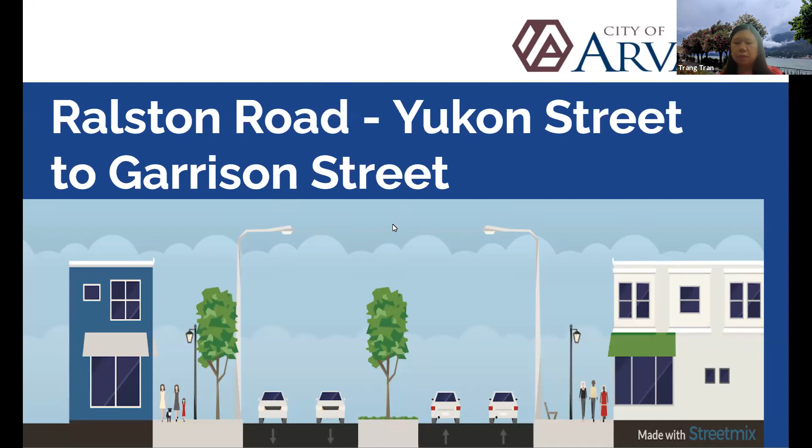Thank you, Rachel, and thank you everybody for being able to log into tonight's virtual meeting for some of our team members to provide you an opportunity to learn more about our project, the second phase of Ralston Road from Yukon to Garrison. And first off, I would like to introduce our project team, because without all of them here tonight, our project wouldn't be able to move forward.

My name is Trang Tran, and I will be the project engineer for the city. We have our Public Works Director, Don Wick, as a panelist. Next is Jacqueline Rhodes, our city engineer. Then we have Chris Lisberg, the transportation design manager. As you met before, Rachel, she's our communication manager for our infrastructure work system. Next is Joe, the roadway engineer representing Felsburg Holt & Ullevig. Up next is Mike Salmon, the project manager for Hammond Infrastructure. And lastly, we have Jan - I don't want to mess up your last name - she is our public information officer for this project. Next, please.

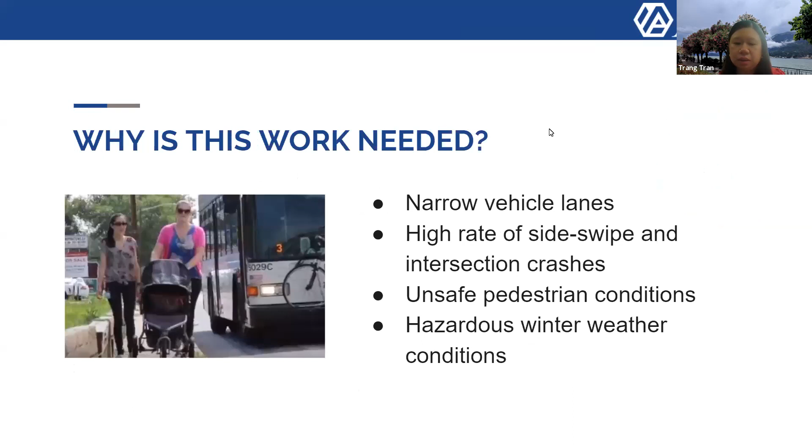I'm sure some of you might have asked, why do we need to improve this corridor? As you can see, we have several reasons why Ralston Road is the number one priority in terms of infrastructure improvements for the city. As of right now, the drive lanes are very narrow, approximately 9 feet wide instead of the typical 12 feet as recommended by the federal government and our engineering standards and specifications. Secondly, the rate of side swipe and intersection crashes is high compared to similar street classifications, similar to Ralston Road. And Ralston Road, being an arterial street, serves about 24,000 cars a day.

In addition, we have unsafe pedestrian conditions due to the sidewalk not meeting current ADA standards. And also, the winter driving conditions are hazardous on this corridor. Next, please.

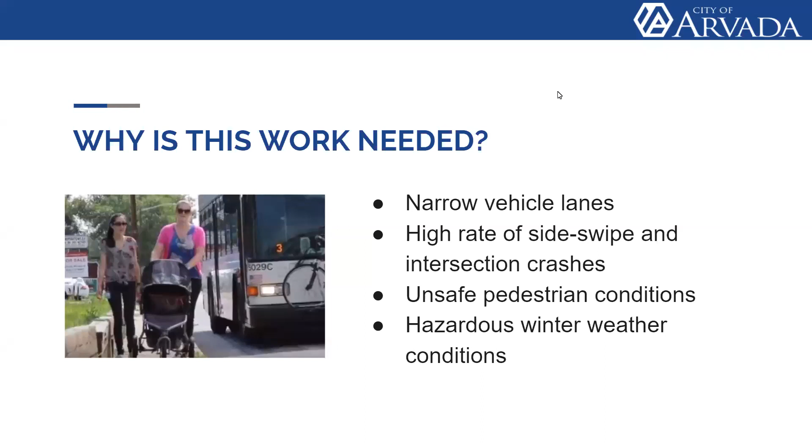So in order to solve some of the issues that I mentioned, our scope of work will include the installation of an 8-foot detached or a 10-foot attached sidewalk. The detached sidewalk will include a 7-foot tree lawn with shrubs, trees, and tree grates where there's no utility conflict. The drive lanes will be widened from 9 feet to 11 and 12 feet to meet current standards. The construction of the center two-way left turn lane and/or landscaped medians will be 12 feet wide. Three of the medians will include district markers to differentiate three distinct areas of the corridor.

The east section is the Remember section, due to its location with respect to Old Town. The middle section is Celebrate, which is to celebrate civic and public service. And the last portion, the western portion of the corridor at Garrison, is Inspire, where the public comes from West Arvada to Old Town, which is the heart of the city. The project will also reconstruct the aging traffic signals, and they will be connected to the city's fiber system to improve traffic progression.

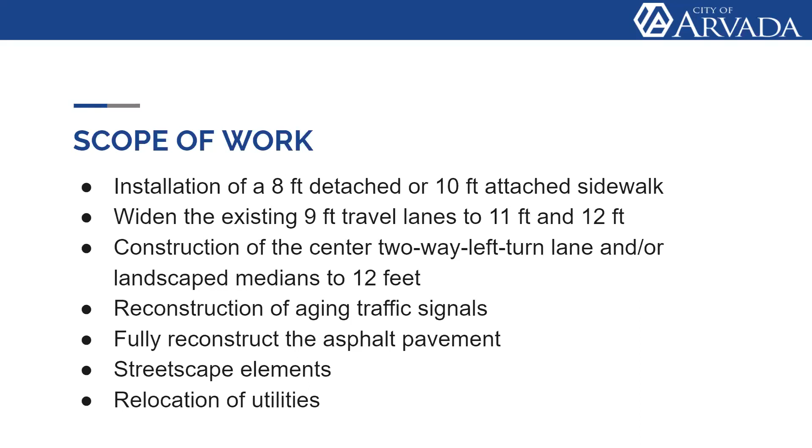Also, the asphalt pavement will be rebuilt to a full depth of 9.5 inches to improve ride quality. The streetscape design goes beyond a typical street widening project. Those elements will include pedestrian lights, landscape tree lawns and medians, benches, trees, tree grates, and enhancement of Wolf Park to include art displayed by local artists. And lastly, we will relocate the utilities - overhead lines will be converted to underground, and we'll also relocate the storm sewers. Next, please.

Our project is funded through the 3F ballot approved by residents back in November of 2018. The amount approved for the project is $15.3 million, being one of 2 bond projects. The second bond project is West 72nd Avenue from Kipling to Simms Street. In addition to the bond funding, the Arvada Urban Renewal Authority has partnered with the city and agreed to invest $3.5 million to help with the design and construction of the streetscape elements I just described.

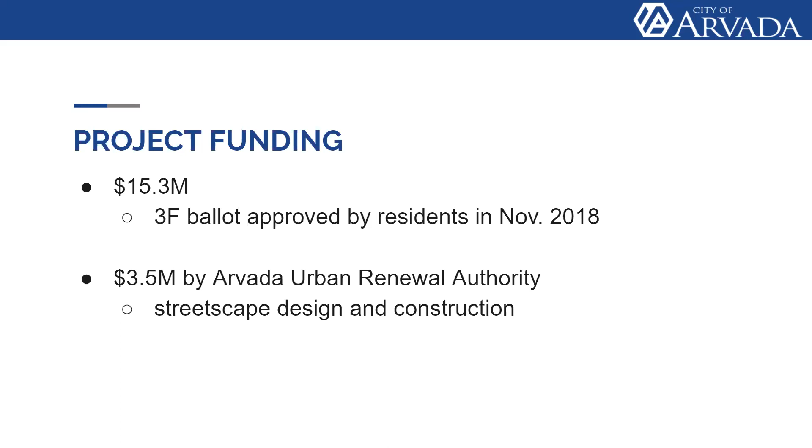Regarding the project timeline, we started back in 2019 with design and right-of-way acquisition. In about 2 weeks, the project will officially start with the issuance of notice to proceed 1 to our contractor. The project will take approximately 2 years to complete, anticipated in April 2023. Once construction is completed, it will enter the 2-year warranty period per our current standards and specifications. Next, please.

Regarding the construction schedule, I'll turn this over to Mike Salmon. Mike, please describe our project phasing.

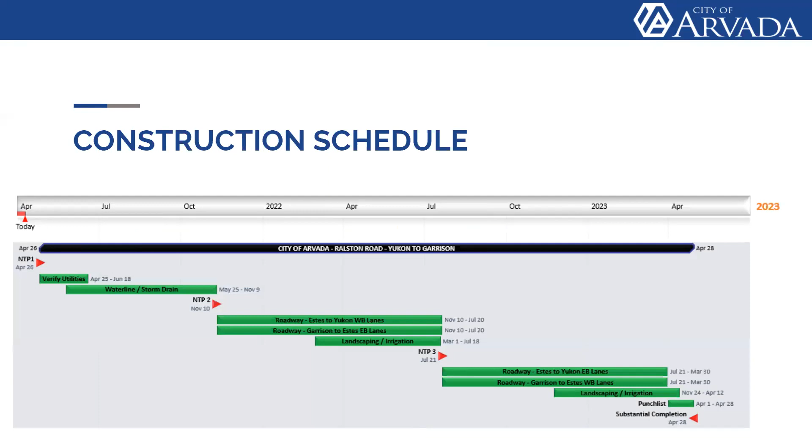We start with a very heavily populated street with existing utilities. So we begin the project by verifying all of the existing utilities in the road, hopefully eliminating any conflicting permanent work, redesigning it, correcting it, and or installing around it. Our first action is to install the water line. There's a water line at both the east portion and the west segment of the project that needs to be relocated. We'll start by installing the new main before taking the existing mains out of service.

That will last between 6 to 8 months, at which time we'll move into full roadway construction. You'll see in April, a little into May, where we begin shifting traffic to access the water line and the storm drains. That will likely stay in place through the second phase, notice to proceed 2.

The roadway work will take place from Estes to Yukon in the westbound lanes and Garrison to Estes in the eastbound lanes. So there's a bit of a shift at Estes where we're transitioning traffic from the north side of the roadway to the south side.

Once that work is complete, we'll shift to notice to proceed 3, where we'll flip traffic so we can access the unfinished portions and build Estes to Yukon eastbound lanes, Garrison to Estes westbound lanes. That's the north portion from Garrison to Estes and the south portion from Estes to Yukon. That will complete the project with irrigation and landscaping in the medians and outboard shoulders.

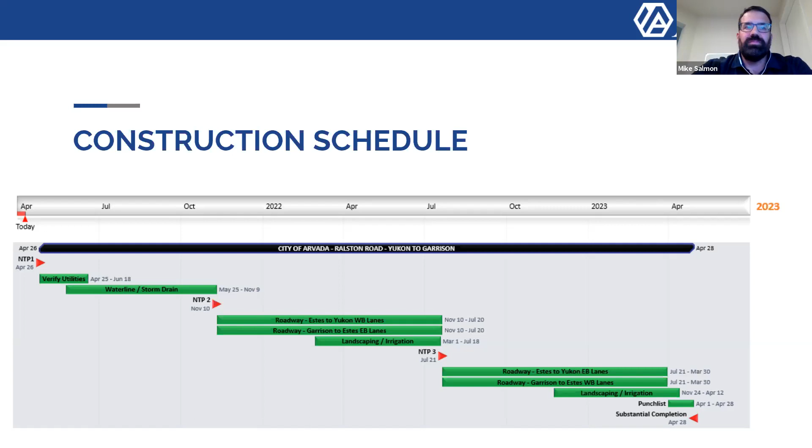Thank you, Mike. As Mike described, construction will be completed in 3 phases. The first phase is utility relocation, then the contractor will shift to the south to widen the north side, and lastly shift traffic to the north side to widen the south side.

Also, in our contract and in negotiation with the property owners, we agreed that business access will be maintained during normal business hours.

Additionally, RTD service will be impacted, but we are in coordination with RTD so the impact will be minimized. Just like phase 1, one lane in each direction will be open, remaining Monday through Friday from 8:30 to 3:30. Unfortunately, disruptions to the traveling public will occur during those hours.

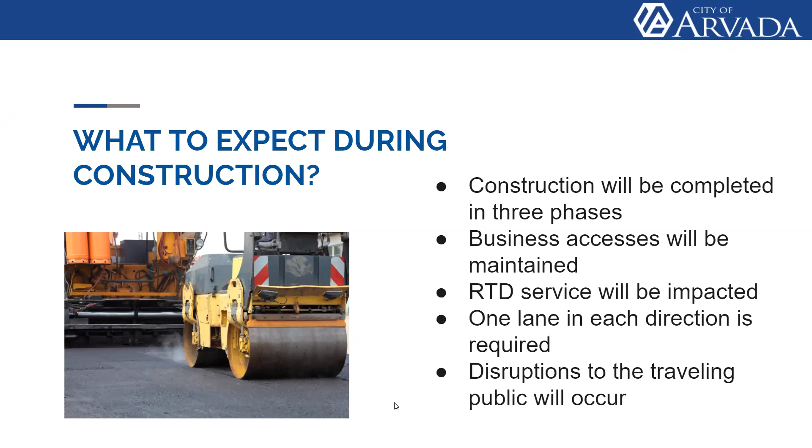Next, please. The city has come up with an alternative route to show the traveling public where they could go to get around the construction. This is very similar to the first phase alternate route, and we will upload this route onto the city's project website.

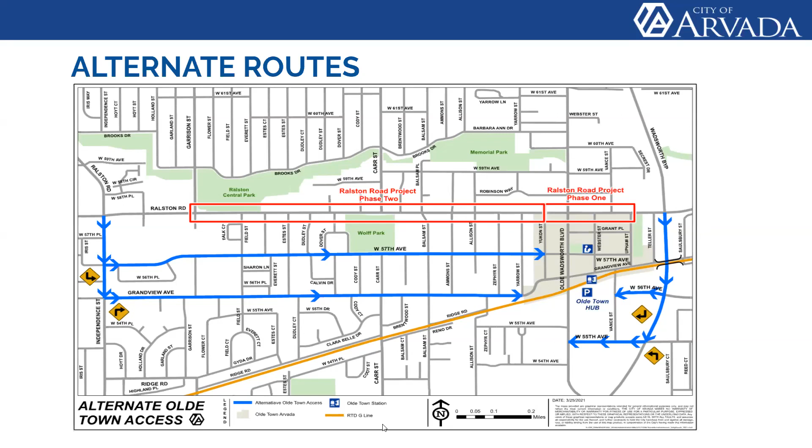So please, we request that you plan ahead to get around the construction sites. There are ways for the public to stay informed. We do have on the city's website, specifically for the Ralston Road project, arvada.org/Ralston Road project. You could also sign up for email updates through the project website to get general information on construction updates.

We also have uploaded into the city's website a roll plot of the site plan in which you could see which part of the road, whether the sidewalk is going to be detached or attached, and you could also see impacts to each property. We do have a general inquiry website, email address, and phone number.

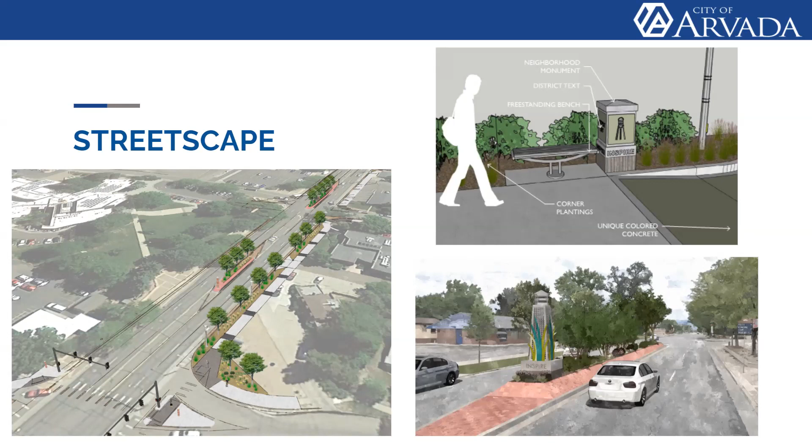We have another question. This is a little bit off of the project, but we've got a lot of people here who know things. So what is the plan for the city building on the southeast corner of Garrison and Ralston that's being demolished now?

I think that property used to be city property, but I believe in March of 2020 of last year, the property was transferred to the Arvada Urban Renewal Authority for redevelopment. So as of right now, there is mitigation on the building due to asbestos, and my understanding is that once it's done, it will be demolished. I believe there's been talks with Aura working with a developer to improve that parcel and also the parcel to the south at 57th Avenue.